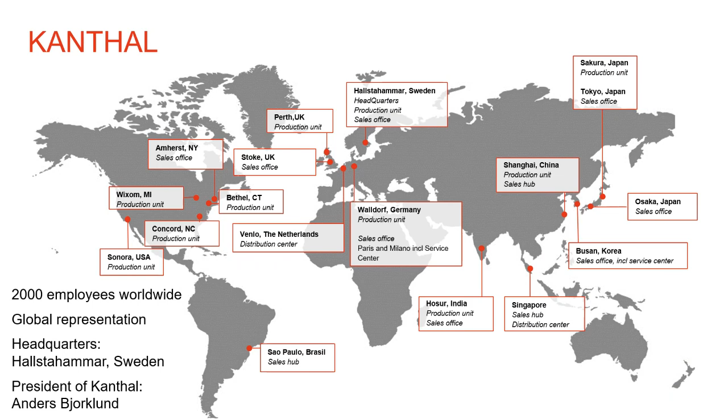A quick introduction of Kanthal: we're a global heating materials and systems company. We have offices and manufacturing facilities throughout the world, approximately 2,000 employees, over 5,000 customers, so we have a presence in some form or fashion everywhere you might be located. Our main headquarters are in Hallstahammar, Sweden.

As part of the introduction, I wanted to discuss briefly the glass tempering application and give some general background details on the manufacturing of glass, just to set the stage for the heating element discussion.

So a general overview of the basic glass production process: it's fairly straightforward. The raw materials go through a melt, then a float, then forming, annealing, cutting, or a tempering process. The float process is done at relatively high temperature, 1100°C or 2000°F, and it's the formation of plate or flat glass. Essentially, molten glass flows on a tin bath, then is slowly cooled, going under a controlled cooling process to get the right shape and thickness of glass.

More of a finishing process is annealing glass. It's done at various temperatures to remove any residual stresses from the forming process within a shaped product, for example a glass bottle. Another finishing process is what we consider tempering glass. It's done at 650°C or 1200°F, and it's really done to increase the strength of the glass and to add a safety factor to the glass.

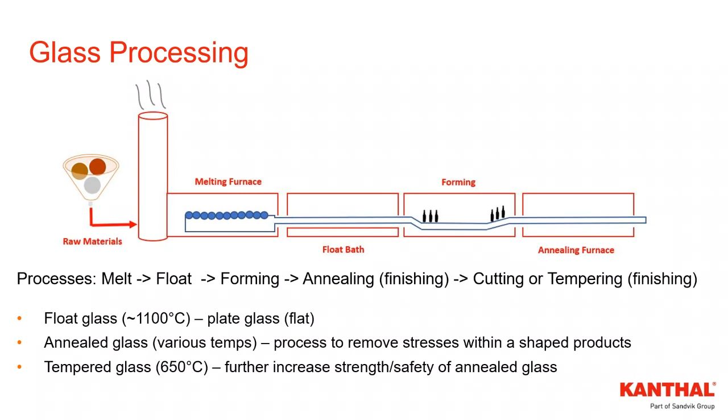Now, glass annealing, as I said earlier, is a post-forming heat treatment of the glass done in an annealing lehr, and that's heating with either gas or electric. An annealing lehr establishes a homogeneous temperature profile within the formed product, to alleviate any residual stress in the material.

Formed products like glass bottles, as in the picture you can see here, have a variable temperature profile after the process before they're annealed, due to the variable shape and thickness of the glass.

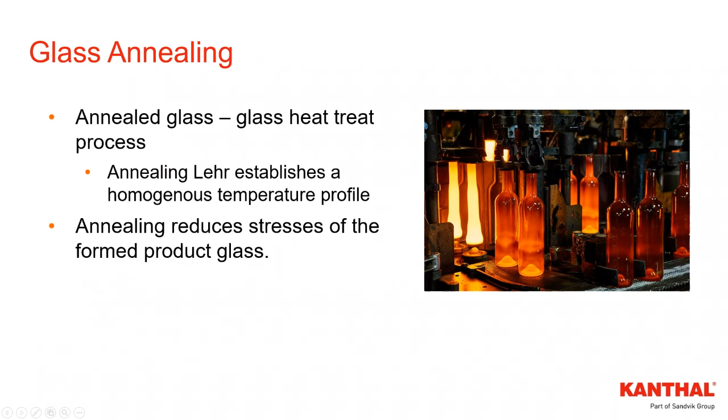And then the last intro slide, just a little more detail on glass tempering. Essentially, tempering is a process that increases the strength of the glass by a factor of 4. It's a heat treat process conducted in a higher temperature furnace, about 650 centigrade or 1200 Fahrenheit. It goes through the furnace, and then undergoes a rapid cooling.

That's cooling on both sides of the glass as it passes through an air cooling chamber. This process locks the outer surface in compression and the core of the glass in tension. So essentially, when the glass breaks, it crumbles into shards that can be picked up with your hands—a lot safer than if you broke a beer bottle, which is very sharp, jagged, and could easily cut you.

So it's important to note that products that come out of glass tempering are typically a simple flat shape, and that ensures a uniform temperature profile. They cannot be cut or drilled after they've been tempered.

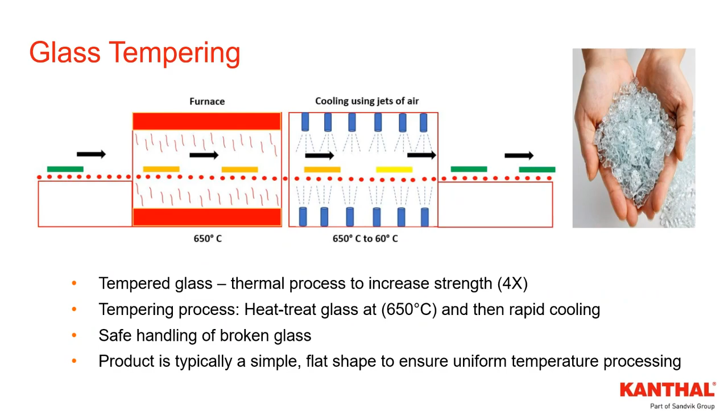Some products made for the glass tempering application: you might have architectural glass, like windows, doors, tables, stairs, railings, etc. Some sports arena applications, like boards for hockey rinks or backboards for basketball hoops. A lot of automotive windshields and windows, display cases, office partitions. A lot of appliances will use tempered glass.

I know a lot of people do home remodeling lately in bathrooms—you might have their shower doors, refrigerator doors or trays, any cookware, diving masks. So there's a lot of different products that are tempered. Essentially, that's the general background on glass tempering.

And now we'll get into details about electric heating elements. But first I want to cover some background just to set the stage—these are basic details as related to electric resistance heating.

Resistance heating utilizes conductive materials, conductive alloys, and it converts the flow of electricity within the alloy into heat energy. That's based on the resistive qualities of the material—different alloys have different resistivity properties. And that's all based on Ohm's law.

So the simple voltage is the amperage or current times the resistance, or you get a resulting power, which is the voltage times the current. Just as a quick reminder, electrical resistance is a material's opposition to the flow of electricity, measured in ohms.

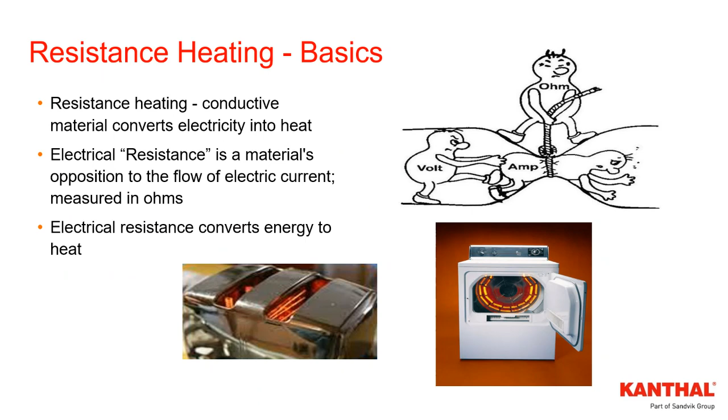Now we'll get into a more interesting topic, probably for everyone, and why they're here: heating element selection and design. It breaks down into a few different identification factors.

We have alloy grade—typically it would be a nickel chrome alloy or an iron chrome aluminum alloy. Those are kind of the two main alloy grades used for electric industrial heating. And then you have alloy shape.

For instance, you might have wire, which is round, or strip, which is a flattened form. Then you have a style of heating elements—you might have coils, rod overbends, bundle rods. There's a lot of different types of heating elements and styles.

And then you'll want to be aware of the heating element specifications—these are the dimensions, essentially the output of the heating element into the system. And then we'll cover quickly just why Kanthal—why are we discussing heating element selection and design?

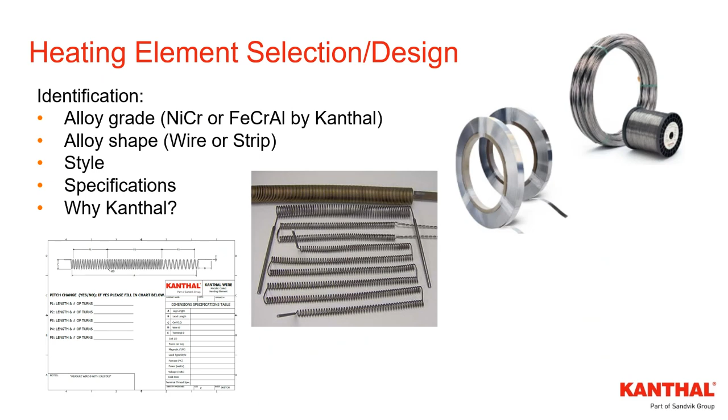With heating element designs, it's important to consider the element life, as element failures will impact your production cycle of the glass. Typical element life is measured in years for this application, perhaps on average 2 to 3, but it could be less or more, depending on the application.

I have included here some details and pictures of some common element failures. Here at Kanthal, we can assist in conducting investigations on the causes of element failures and make recommendations based on that investigation.

So you might have overheating, corrosion. This is green rot, specific to nickel chrome alloys. You might have sulfur attack, from the process or atmosphere. Again, uneven pitch of coiled elements, which might be from elements sticking to the refractories.

You can get scratches on the coil during manufacturing or installation, which exposes some of the base material. You could also have poor element design, such as a bundle rod heater where the discs are too far apart and the straight legs of the element, the hairpins, are sagging. Or it could be the way the terminals are connected to the element, or how the element is installed or utilized, or perhaps it's underpowered for the application.

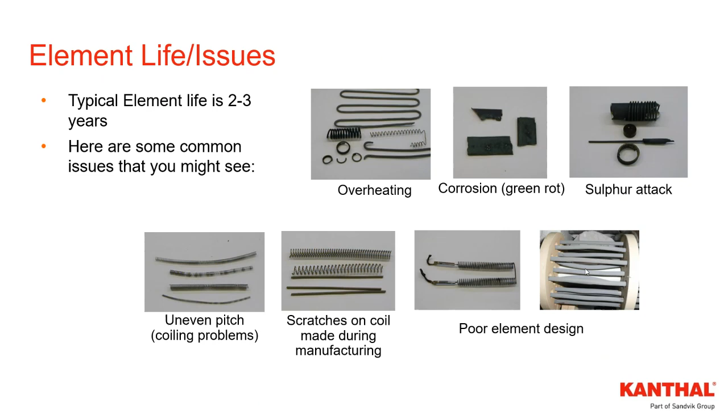The first detail when selecting heating element design is, as I said earlier, details related to the resistive alloys. Resistive alloys allow for the flow of electricity and are capable of operating at high temperature. That's a key aspect - there are plenty of alloys that allow for a flow of electricity but cannot operate at high temperature. You need the combined effect of both in order to have a good alloy for installation into an industrial furnace.

The high temperature resistive alloys essentially fall into two categories or groups: nickel chrome, or Nikrothal as we call it here at Kanthal, or iron chrome aluminum, or Kanthal alloys. There are various grades within each of those groups - different grades of nickel chrome and different grades of iron chrome aluminum.

Alloy selection is based on the furnace or application requirements. You have to consider quite a few things, such as the temperature of the furnace, and how that relates to the oxidation and strength of the heating element, the atmosphere of the furnace or application, which affects the element, and the presence of any chemicals or gases you might have to consider.

Then there's the operating cycle of the furnace, related to how the furnace is run - whether it's just on-off, either running or not. You might have intermittent use where it's cycling occasionally, or you have continuous use where it's always on.

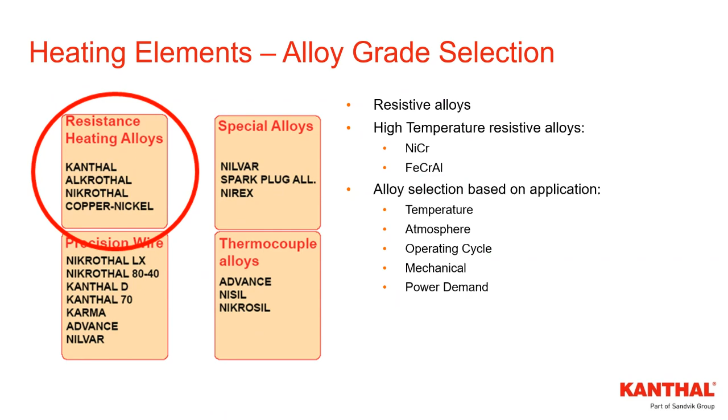There are two basic details showing the differences between the two groups of alloys, the nickel chromes and the iron chrome aluminums. Performance mostly revolves around the protective oxide layer formed on the heating alloy. Nickel chrome forms chrome oxide, and iron chrome aluminum forms an alumina oxide. The oxide formation and thickness differs between the two alloy groups.

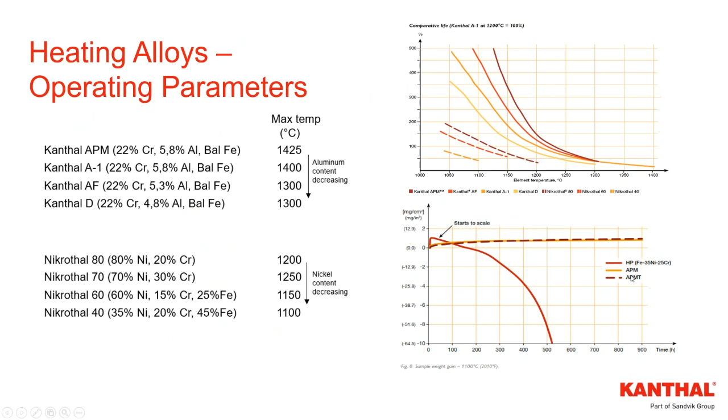On the left, I showed details on the chemical content of the various grades of iron chrome aluminum alloys and various grades of nickel chrome alloys. The graphs on the right show comparative life between an element that's identical but made with different alloys, and the oxide performance of the different alloy types. The graph isn't labeled here, but APM and APMT are more iron chrome aluminum alloys, and iron nickel chrome is more a nickel chrome alloy, in terms of oxide performance and spallation.

And then we have here some pictures showing the performance of the oxide, and then some basic strength of the materials, and comparisons.

The more oxide that spalls off the alloy, the more oxide thickness and spallation occurs. There's a difference between an iron chrome aluminum alloy and nickel chrome. A material with a thicker oxide that tends to spall off more, like nickel chrome, will consume more of the base material. Iron chrome aluminum has an aluminum oxide or alumina, so you spall off aluminum and consume aluminum in the base material. With nickel chrome, it's a chromium oxide, so you consume chrome.

There are also details on differences between the creep strength of the materials. Depending on the alloy used, you might get bunching of a coiled heating element. This bunching could result in overheating and shorter life. This shows the differences between different grades of iron chrome aluminum - you might get less or more bunching depending on what grade of alloy you're selecting.

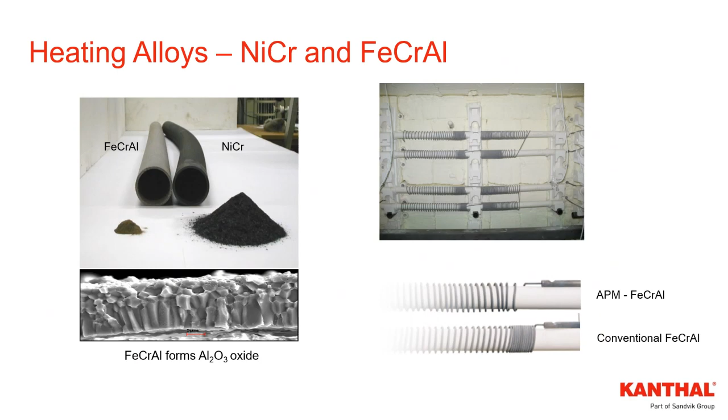The next selection criteria concerns the alloy shape, the shape of the raw material that the element is made from. There are three essential basic types. You have round wire, which is just traditional round wire, as it says.

Then you have two different flattened type wires: ribbon and strip, which sometimes get mixed up. Ribbon is basically made by starting with round wire and then flattening it, so the edges of ribbon are rounded, making it a safer material to handle. Strip starts as a coiled strip, a flat rectangular piece of material that can be rolled and flattened to get a specific thickness. It's important to note that the edges of strip are square and sharp, not rounded like ribbon material.

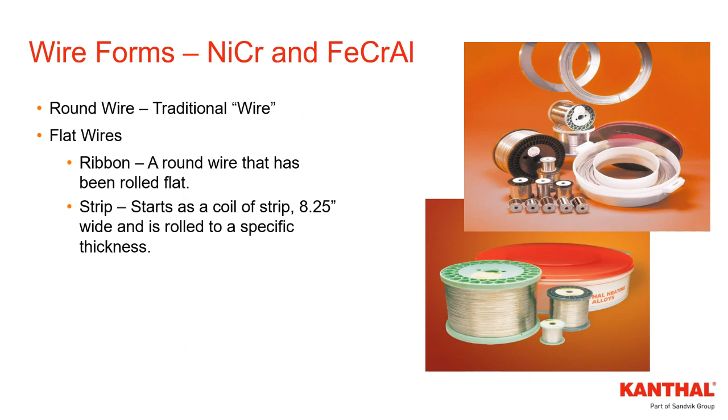I wanted to point out these different wire forms because typically different styles of heating elements will perform better using one specific alloy shape or another. For example, traditionally round wire is used with a coiled heating element - not always the case, but typically.

Next we have different element styles. These might typically be used anywhere from 100 degrees centigrade up to 1300 degrees centigrade, or 212 degrees Fahrenheit to 2372 degrees Fahrenheit - this is our metallic element style temperature range. You might have coiled elements, which are probably the most common used in the glass tempering application.

You could have ROB type elements using strip material or wire material. We also manufacture, or you might use, bundle rod type heating elements or RT heating elements, which could be either nickel chrome alloy or iron chrome aluminum - that's true with all of these different types of heating elements. We also see heating elements used in the glass industry for air heating cassettes or plug rack heaters.

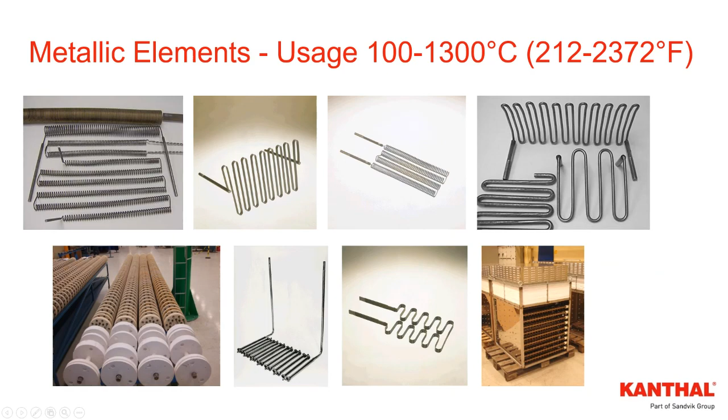I wanted to include some graphs to demonstrate there are differences in recommendations when designing heating elements based on the style of heating element and how it's used within a furnace. This is all part of the heating element selection process.

The two graphs here just show some comparative information on a coiled element and its resulting watt loading, basically its power output, comparing a coiled element that's freely radiating - supported on a ceramic tube that spans the furnace chamber - with a different type of coil heating element installed within grooves contained within the insulation walls of a furnace, which we consider a semi-embedded heating element. You can see in the graphs there are different watt loading recommendations depending on the style or alloy used - nickel chrome or iron chrome aluminum - and the different ways the elements are installed.

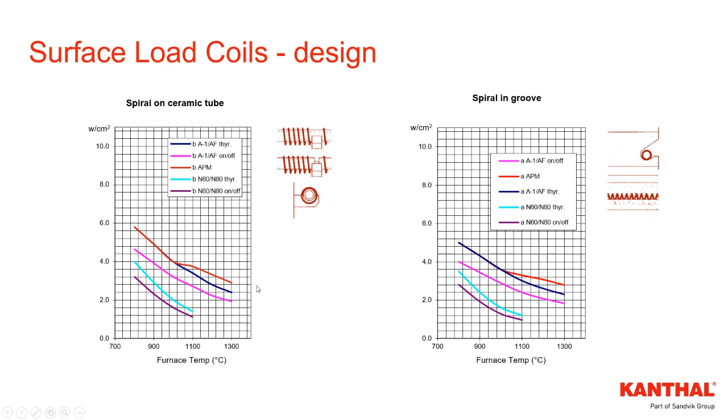Another example I have here is for ROB or meander type heating elements. ROB stands for rod over bend, so it's essentially just a sine wave or a loop of material. The recommended loading for the design can vary depending on whether it's using round wire or strip material, and again there are differences between nickel chrome and iron chrome aluminum.

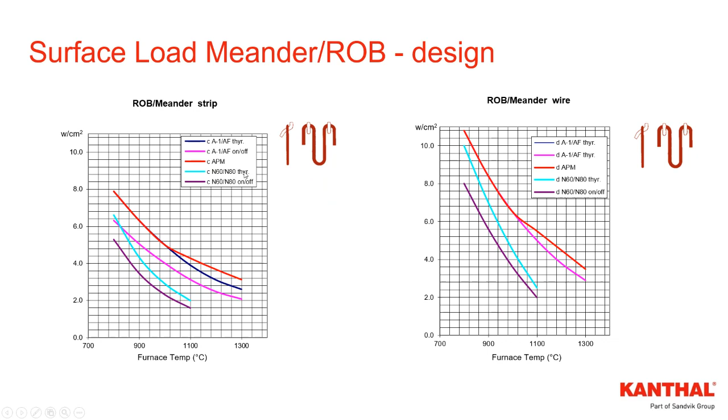You'll also note that it shows differences based on how the elements are controlled. This has to do with the control system - whether it's on-off, cycling through an SCR that might be burst fired or zero cross type, or using a softer phase angle fired SCR.

Some additional details to help with element specifications. We use a lot of design questionnaires and element drawing templates, essentially to gather all the furnace particular details and parameters of operation of the furnace.

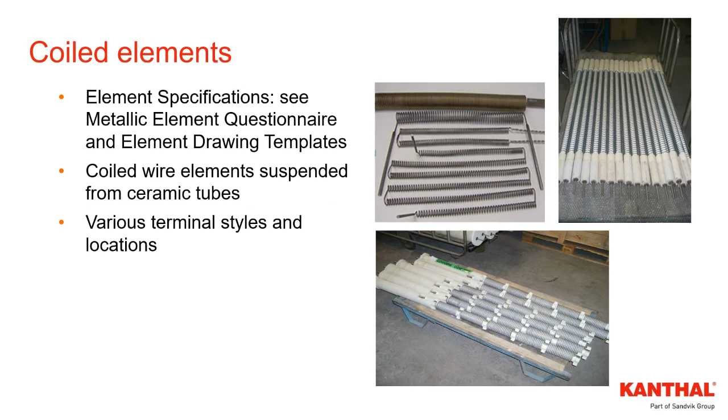We have a lot of details about coiled elements, since this is probably the most common type of element used in glass tempering, though not the only type. Typically these elements are suspended by a ceramic, usually mullite tubes, and there could be various styles, including single leg or multi-shank elements. You might have single or multi-hot zone elements, varying the pitch of the coil intentionally to adjust where heat is concentrated along the element's length. You also might have elements located in the roof or floor of the furnace.

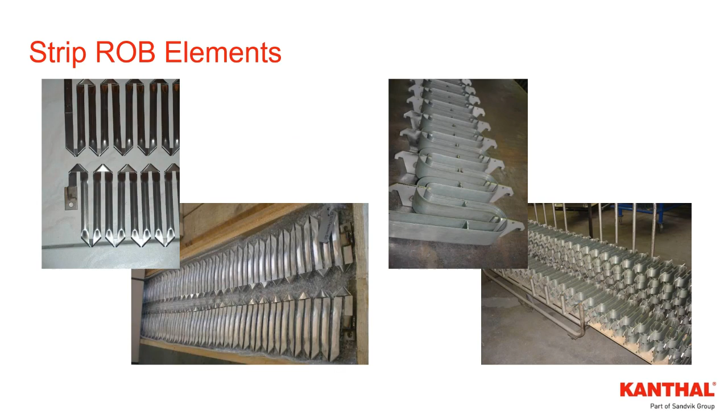Another style of element is a strip element, known as strip ROB type elements. You might have a folded strip element laying flat, basically material folded on itself to form a rod-over-bend (ROB) type element, or a double strip style element where the element rests on the strip edge rather than laying flat. These are two different styles of strip ROB elements.

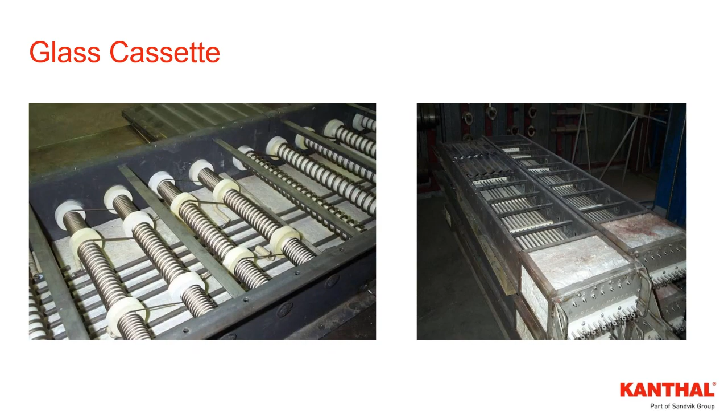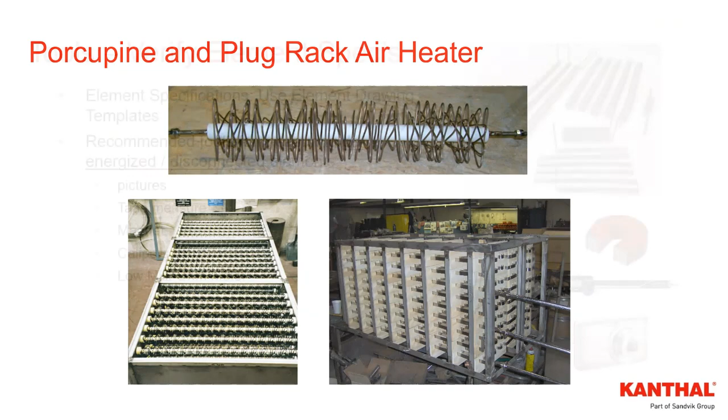Some tools used for verifying element specifications. We use a lot of physical tools in our daily work designing heating elements and determining existing heating elements and everything else - essentially to gather information.

We have element specification questionnaires and drawing templates, with some examples on the next slide. Some basic element tools are used to get dimensions and specifications, like taking pictures or using a tape measure. It's important to note you might want to use a magnet to help identify if it's a nickel chrome alloy, which is not magnetic, or an iron chrome aluminum alloy, which would be magnetic.

Typically, when designing elements, you want to use calipers - you don't want to measure round wire diameter dimensions with a tape measure, since that's not precise. Calipers give a much more precise dimension on gauge sizes of wire or strip material thicknesses. You might also want to use a low milli-ohm meter to measure the resistance of an element when it's disconnected from the power supply.

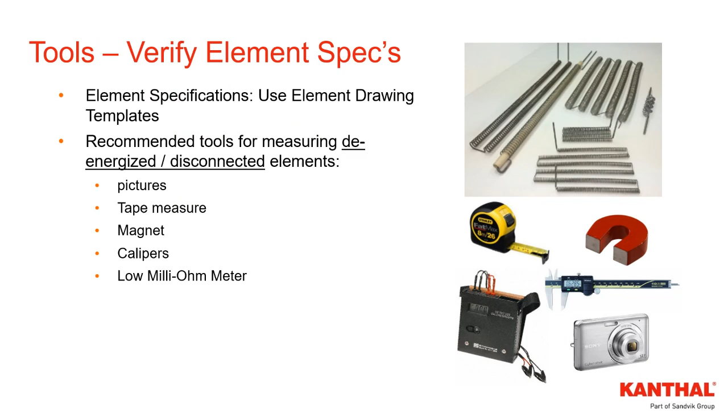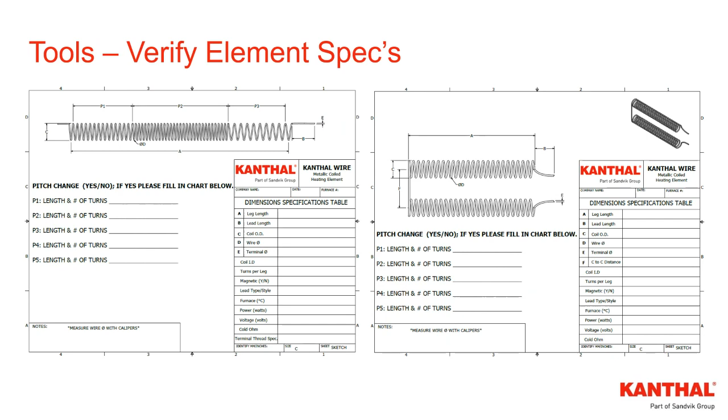Here are some general templates we use for getting all the specifications, details, and parameters of a heating element, ensuring that when we design a heating element, all the parameters are included. I have two more quick slides, and then we'll get on to the question and answer period.

So just quickly, why Kanthal? This question comes up - Kanthal manufactures the heating alloy wire and has the technical expertise with the full range of heating alloy grades and heating element styles and designs. So we can help you select the proper alloy, the proper alloy shape or configuration, and the element style to best suit the application.

And lastly, we can also help with any issues you might have, such as element failure analysis. You might have an application where you're looking for faster throughput, higher temperatures, more power out of the system, or longer element life—essentially element performance. We can also look at element limitations to overcome them, since as shown earlier, different styles of elements and how they're installed have different limitations.